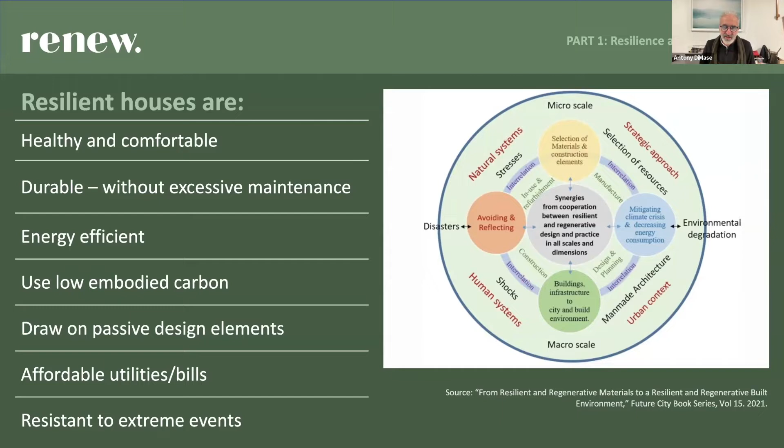Fundamentals of passive solar design.

I'm an architect who was trained in the 80s, mid to late 80s, at Melbourne University, and passive solar design is what I was taught as an architect. It emanates from the oil crisis in the 70s, when architects were looking at how the design of buildings can respond to the changing patterns of seasons, winter and summer, using cross ventilation and natural sunlight from winter, where the sun comes in at a shallower angle, while omitting the hot summer sun in the summer months. So it's very much about creating buildings that respond to the natural environment.

The term 'passive' means the design is doing all of the work, allowing the naturally occurring cycle of day and night and the changing seasonal conditions to assist in heating and cooling the house. To some extent, all buildings are passive solar designed. It's just that if you get the principles right, you spend a lot less money on heating and cooling, and you get a house that's much more comfortable to live in.

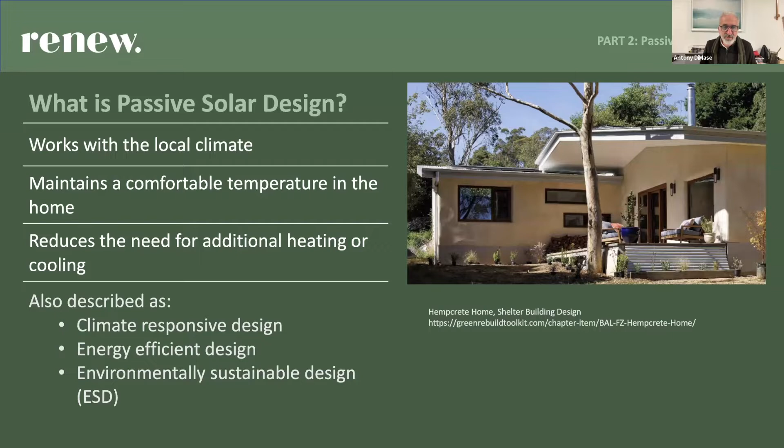The benefits, I think, are self-evident. Energy efficient houses require less energy from our gas companies, less energy from our water company, less energy from our power companies, and less water coming into the house, because we're using the resources that already naturally occur within whatever block you're in.

Health and well-being - I believe that's one of the biggest benefits of any good design, that your health and well-being is improved as a result of good design connected to the natural environment. It can be affordable. I don't think it's of itself affordable, but I think it has the hallmarks of being affordable. And of course, it's sustainable, and sustainability is such a big factor in the way we think about buildings in the 21st century.

So we want our buildings not to add to the degradation of the natural environment. By creating sustainable buildings, we're creating buildings that will last, and buildings that don't require as many resources from the natural environment for the people to be healthy and comfortable.

The main principle is that it's designed for climate, so it is very much about the local economy and the local climate. Passive heating and cooling is essentially using the sunlight in winter to help heat your homes, and excluding that sun by having shading to the north, northeast, and northwest faces of the building, so there's less opportunity for buildings to overheat.

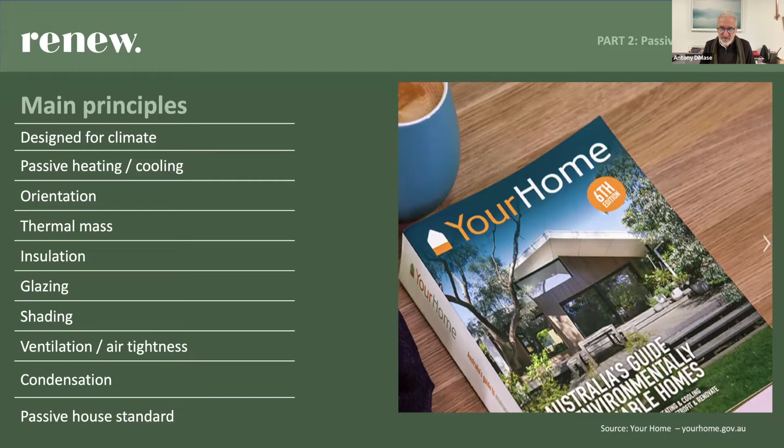Some of you may have heard of passive house. Passive house is different to passive solar design. There's lots of overlap, but they are two different standards when we're looking at the designs of dwellings in this kind of context.

We in southern Victoria are essentially in a temperate zone. We're not in an alpine zone. We're actually in a very good climate zone, because it doesn't get extremely hot nor extremely cold. Generally those shoulder months, the autumns and springs, and much of winter and summer, we actually have a very comfortable climate where the climate sort of does all the work for us.

But we do get cold and we do get hot, and we're designing buildings for those times when those things occur. You do need different passive design strategies for each of the climates, there's no question about that. So in a hot, dry climate, there's much more focus on cooling. In southern Tasmania, there's much more focus on heating the house.

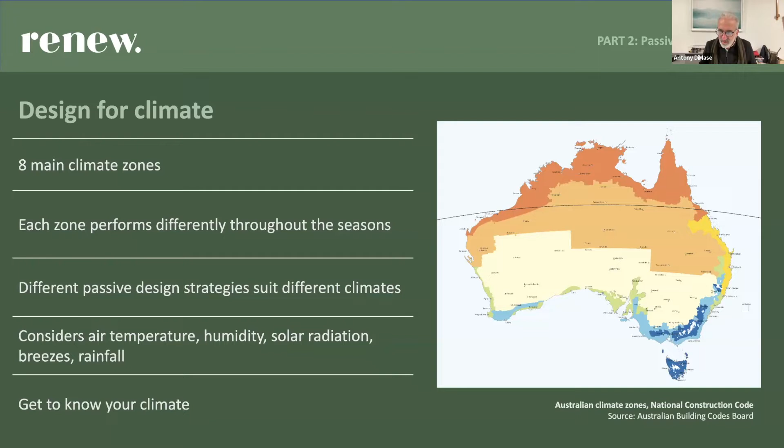Knowing your climate is key, and there are some really good architects and others who really understand the climate of their particular location. They know where the breezes come through, how the sun travels, the differences between summer and winter, and about indigenous planting, what grows and what doesn't. While we can give general principles, having that intimate knowledge of what's happening in your particular location is really, really valuable.

So the essentials, this is really the most basic things you need to know. We want to orient our buildings towards the north in terms of the main living areas, because as humans, generally speaking, we are attracted to light and sunlight. We generally feel more comfortable and more alive, naturally drawn to brighter objects, and we enjoy the heat of the sun on our shoulders.

So if we can create buildings that actually let the sunlight in, particularly in winter, that's a really good thing. In winter the sun is at a lower angle because of the way the earth is tilted, meaning it can penetrate much more deeply into our houses. This gives us the opportunity of bringing winter sunlight into our houses, creating a really nice warm effect. It can heat the slab or brickwork on the inside of our buildings, storing that energy and re-radiating it at night. That's what we're talking about when we talk about thermal mass.

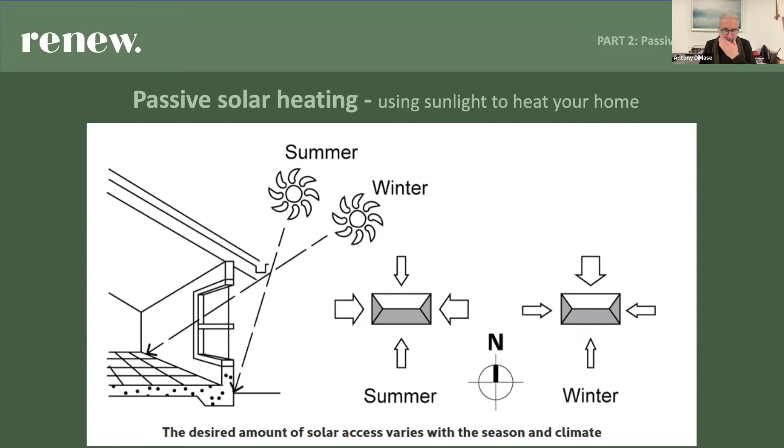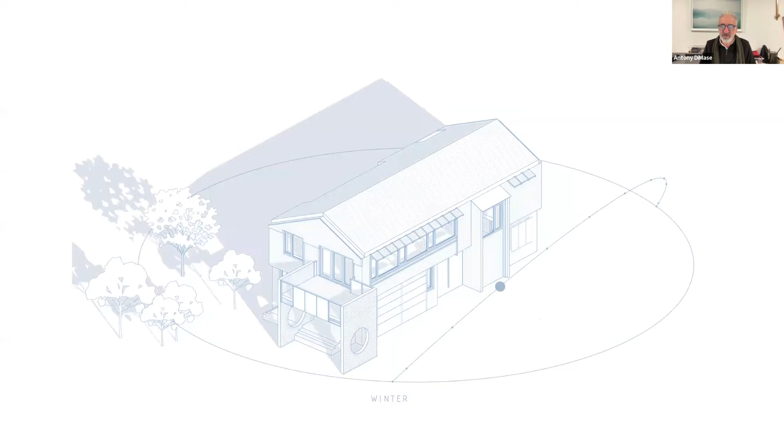You can do an awful lot of modeling. This is a project we worked on where you can actually start to look at the way the sun moves around the building and the effect it has on the interior. Just by understanding the physics and movement of the sun, there are plenty of charts and computer simulations, and architects and draftspeople in your local area will be attuned to this, but also simple observation will give you a really good understanding of the patterns in which the sun moves.

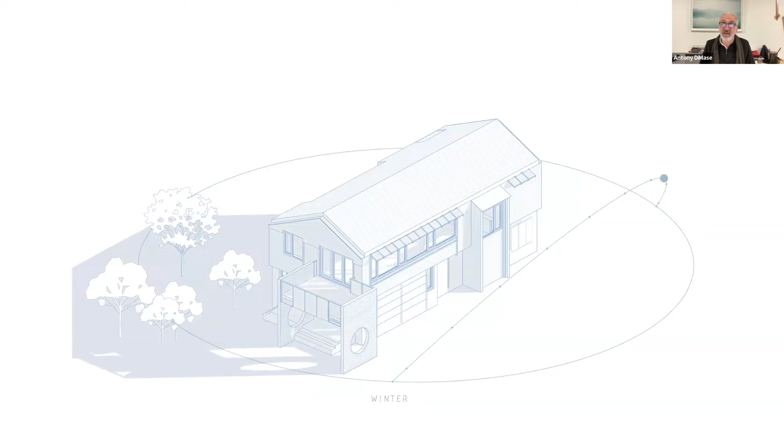I'd also say that not all houses can be oriented to the north. It depends on where you are located, and there are often constraints that don't allow you to have the perfect setup. That doesn't mean you can't apply passive solar principles to your house. Passive solar design is really understanding the physics of how the sun, wind, and rain work, and adapting your particular set of circumstances to meet those requirements.

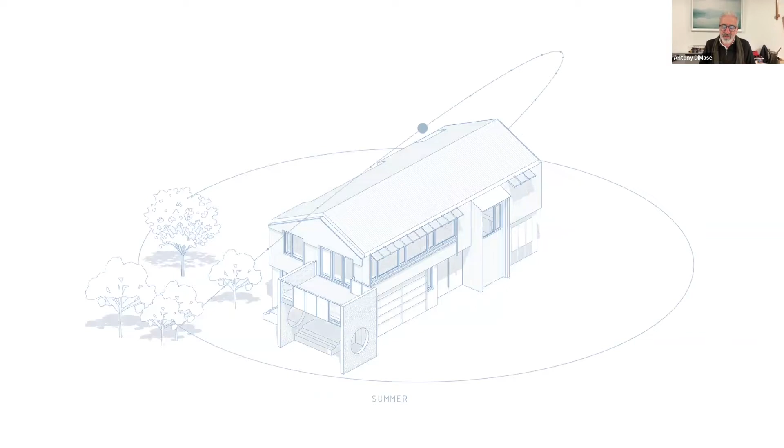So I can give you some general guidance, but the rubber will really hit the road when you're in your local area, at your particular site, really adapting the design of your building to the way those features work on your particular site.

Passive cooling, much like passive solar, is about reducing heat gain. Increasingly, even in Victoria, in my time as an architect, I think more emphasis is now being placed on the cooling of buildings. Whether that's because we're getting hotter summers or whether expectations are that we have cooler environments, I don't know. But I've observed that we're putting a lot more emphasis on cooling environments, as much as we used to consider heating.

As a rough rule of thumb, we'd say you'd put two-thirds of your energy into heating a house and about one-third into cooling. Maybe that proportion is changing, but essentially we want to exclude heat from the hot part of the day and open up the building as much as possible at night when it naturally cools down, and when there's a cool change and cool breezes. Cross ventilation by opening doors and windows on opposite sides of the building, using fans and different techniques, can really quickly cool down a house if you've got those openings working in your favor.

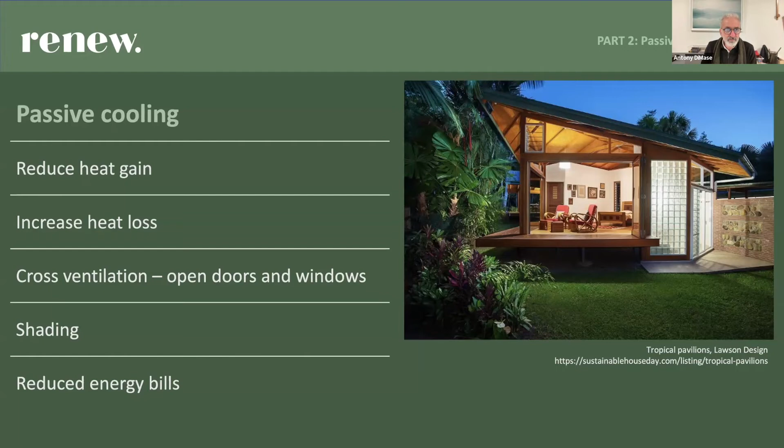So orientation, we touched on that a little before. You could consider a building as having four sides: north, east, west, and south. But more than that, it's probably got eight sides: north, northeast, east, southeast, south, and so on. Each of those orientations has a slightly different impact on the building in terms of how the sun comes in and where the breezes come from.

In really simple terms, if you can design a building that understands those orientations, you'll go a long way to creating a passive solar design building.

As I said earlier, depending on where your building is located, if you're on a suburban street and the street faces a particular direction while the backyard faces another, it may not be possible to put your living room to the north. There may be some restriction for whatever reason. That doesn't discount the importance of passive solar design—it's that you are being responsive to those conditions and adapting to suit them.

But the primary idea is that we want to orient the main living rooms to the north, particularly the northeast, because we want to get that morning light into the main living rooms. Typically we want to exclude that hot western sun, particularly in late summer when the sun is very low but very harsh, which can lead to houses being very uncomfortable. The western facade is quite hard to shade because the sun comes in at such a low angle that you can't really have an eave overhang deep enough to exclude it. So you need either a vertical screen or some form of deciduous planting to exclude that hot western sun.

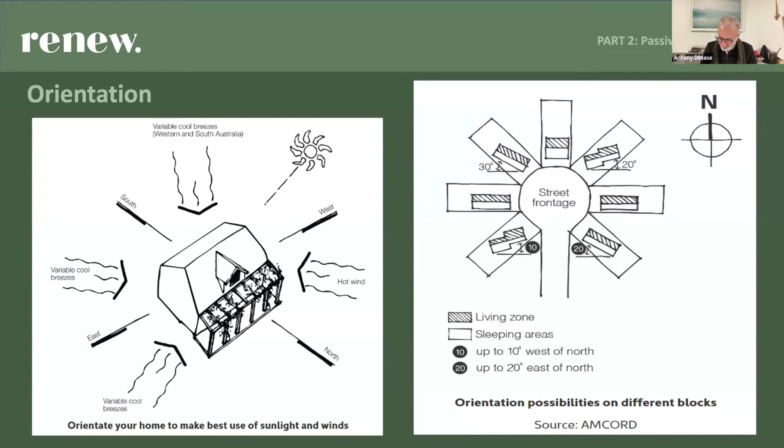Now, if you look at the suburbs of Melbourne, we're getting bigger houses and smaller allotments, which makes it harder to include naturally occurring elements like trees, vines, and plants. So I'd suggest a big part of passive solar design is actually having a smaller footprint, not a larger one, so you have the opportunity for a larger garden that can thrive around your building, creating a naturally cooler environment for the occupants. It's also a really good way to create connection between inside and outside.

So the size of the dwelling matters a lot. Here in Australia, we have amongst the biggest houses anywhere on the planet, bigger than the US per capita. The average house here is something like 250 square meters, which is quite substantial. And I've seen many houses much bigger than that.

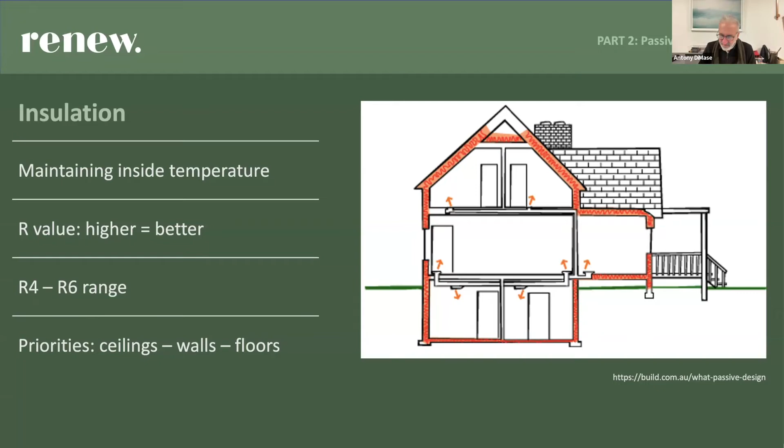Thermal mass, we talked a little bit about earlier. It's kind of hard in this context to explain, but in simple terms, if you imagine a concrete slab on the ground in full sunlight, that sunlight heats the slab over time. Effectively, that slab becomes a battery—in simple terms, it's storing energy. As the day winds down and we go into night, the energy from that slab—it doesn't have to be a slab, it can be a brick wall or another form of material that has mass to it—will re-radiate that heat into the evening.

It can work in reverse too. On a particularly hot day, if you exclude the heat from that particular material, then that material, like a concrete slab, will actually stay cool. At night, that cooling effect has a bearing on the interior temperature. So it's kind of a bit of a science, the way you use thermal mass.

I'm a bigger fan of insulation, but those who know will say thermal mass is certainly something you should consider in the design of your buildings. It's particularly suited to places like Mildura, where I'm originally from, which is a very hot, dry environment. It was a fantastic way to work in those sorts of environments because you had a big change between day and night—very, very hot days and very cool nights. So when you have that big temperature differential, thermal mass works a treat.

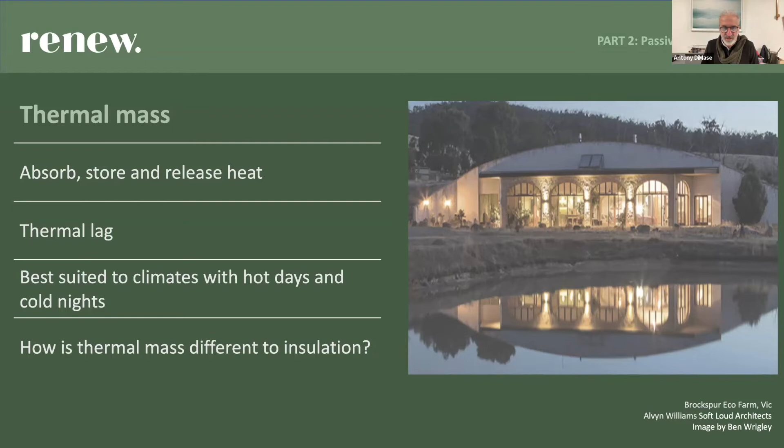Where I live, say in Thornbury in Melbourne, those temperature differentials are not as great, and I would argue it's not as effective. Those of you who are in the Shire will have your own knowledge as to whether it's effective for where you live or not—can't say hand on heart that I would know.

Glazing—I'd just really reiterate something we've seen over the last 20 or 30 years, which is the development of window design here in Australia. We've gone from cheap single-glazed windows, poorly sealed, to a really high standard of windows and glazing systems. And yes, they do cost more—I'm not going to lie—but the benefits are there for a lifetime. So getting the window design right is really critical.

Having too many windows is a big no-no. More or less in terms of the surface area of your walls, you should be looking at about 25% of the area of the walls as windows, no more than that. A lot of architects will design buildings with lots and lots of glass. I would discourage that, but equally we do want windows because we want that connection to inside and outside, and we want the ventilation. So getting the right quantity of windows is really critical when designing buildings for a resilient climate.

The advances in double and triple glazing - window performance is measured as U value. U is actually more or less the same as R, it's just the inverse of R. So generally speaking, the lower the U value, the better the window will perform.

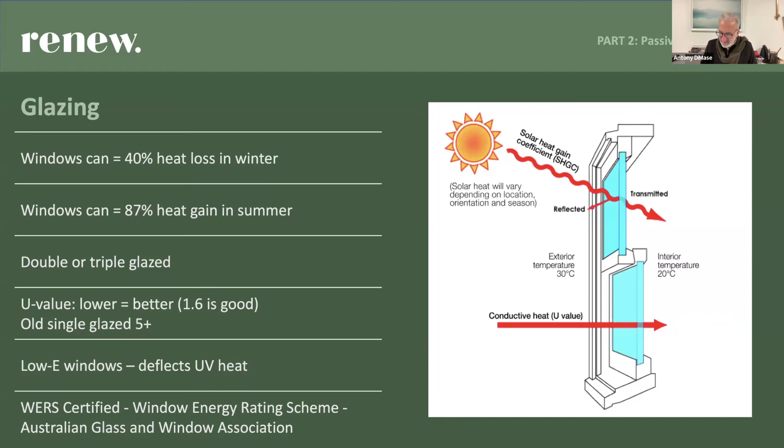Ventilation can be your friend and it can also be your enemy. If you've got a house that is poorly sealed - gaps around the door, vents, downlights in the ceilings, air conditioners with holes into the side, ventilated skylights, chimneys, poor construction with gaps in the floorboards - all of that, no matter how well your house is insulated, is going to contribute to heat loss and heat gain. So ventilation in those circumstances could be argued as a good thing because you're getting fresh air, but it's a bad thing in relation to heating and cooling. Ventilation is something you have to control when you're designing a building.

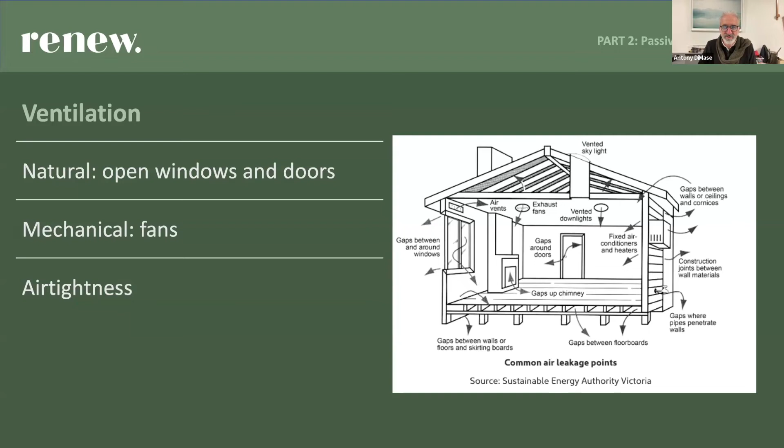You want the ability to control how much heat and cooling is coming in through your building. If you have a well-sealed building, that's what you want to get to, but you also want the ability to open up the building to let ventilation in, particularly when you want fresh air and there's a cool change after a long, hot day. So control is really critical. Most older buildings are very poorly designed from an air tightness point of view.

Condensation - if any of you have been reading The Age, there's generally a discussion going on about the fact that many apartment buildings are suffering from condensation problems, which can potentially lead to mold. This is really dangerous in a house. A house that is not naturally ventilated, where there is not good access to daylight or sunlight, a house that's small and pokey and not well connected to the natural environment, is prone to condensation, and condensation is really a precursor to humidity and potential mold. That's really the biggest problem we have in some contemporary houses, which can lead to really poor health outcomes for the occupants - asthma, respiratory problems, and poor health outcomes. So we want to avoid condensation at all costs, and create environments that are actually healthy for people to live in.

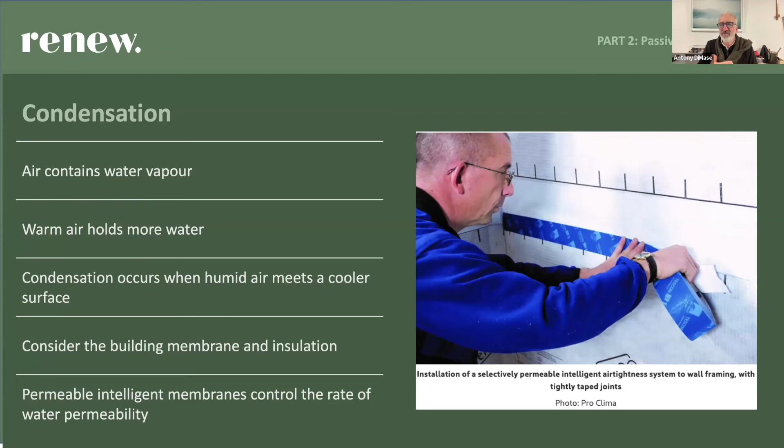Condensation, in really simple terms, is where you get hot, humid air. When the temperature of the air is relatively warm, it has the ability to carry water in it - so it has a higher dew point, it can carry more water with it. When that hot, moist air hits a cold surface, that water in the air condensates and falls onto the carpet or stays on the window or stays on the plasterboard, whatever it is. So it's essentially that differential that creates the condensation. That water is left trapped, and over time that can create huge problems for the people occupying the space.

We talked a little bit about passive house versus passive solar design. Essentially there's a lot of overlap, except that passive house is designed with a criteria in mind, and that is that there is a certain per square metre of space, a set amount of energy that can be used for that area.

It's up to the architect or passive house designer to design a house that actually meets that criteria. It sets a criteria that the designer has to meet in terms of energy use, air tightness, thermal bridging and other factors, and it's up to the architect to design to meet that. By meeting that criteria, you get a passive house standard, which generally means the energy use of that building will be far lower than other similar types of buildings.

So it's a little less vague in the way that it goes about things, and sets a criteria and a standard that has to be measured and tested once the building is built, through a whole series of calculations that occur during the design phase to ensure you are actually meeting that standard.

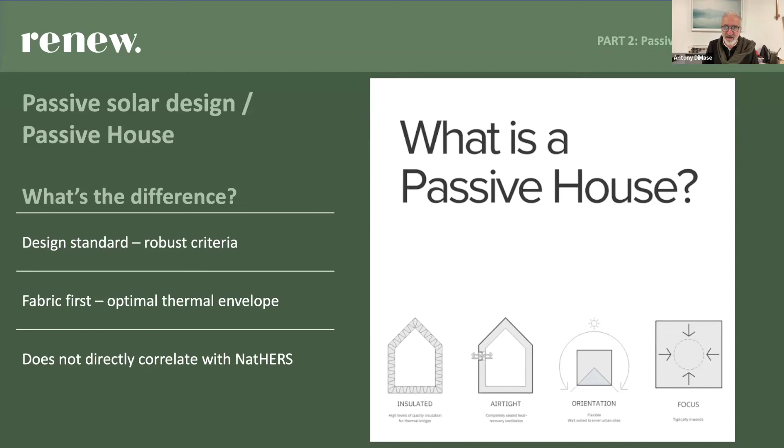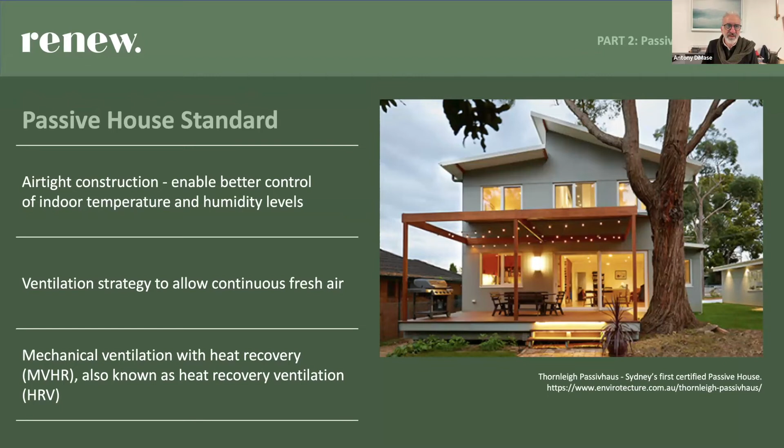Sorry, I did touch on this earlier, but it's about airtight construction - really limiting the amount of ventilation that can come in and out of your building. It usually has a heat recovery unit to compensate for that very tightly controlled ventilation system. There are other things like thermal bridging and a very high standard for insulation that is also adopted for the building.

Sorry, I'm repeating myself, but thermal bridging - I'll just explain briefly what that is. It's when you have an element that is connected between the inside and the outside, and heat can transfer from one side to the other.

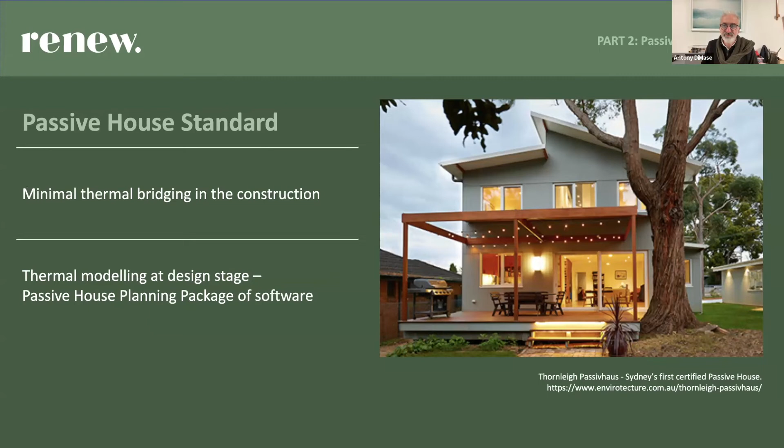Brad, did you have a question? Yeah, I do, Antony. I've been joined here by my wife, who's a carpenter, and has been enjoying the presentation. She just had a couple of questions around, I think it was, permeable intelligent membrane. Is that like a breathable wrap, effectively? Is that what that's referring to, or is it something more sophisticated?

I won't claim to be an absolute expert, but it effectively allows moisture to travel through - you see it in jackets as well - so materials can transfer moisture from one side to the other while keeping the air tightness in. Pro Clima is a company that's been doing a lot of work in this area, and the advances in that kind of technology have been really through the roof.

And just one further thing on that - does both the wrap and the cladding need to be permeable, or can you resolve that by battening out the cladding from the wall a little bit, so you've got an air gap there that the moisture can get out to?

It sort of depends on the situation. Battening is good. Generally speaking, on a typical external wall construction, you have a weather wrap which goes on the inside of the cladding, just before the cladding. You then have your bulk insulation in the studs, and ideally a continuous layer on the inside, then a permeable membrane on the inside, which can also allow for the transfer of moisture. But the outside layer, if I've understood your question correctly, is more about preventing moisture from entering the building - it's effectively the rain screen for the building. Where it sits in terms of the battening doesn't matter terribly much, but it does matter on the inside face.

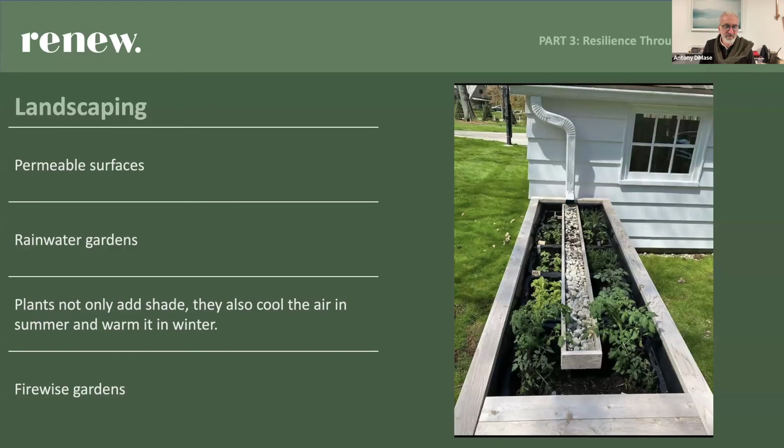Landscaping, I think goes without saying, has a really important part to play in creating a healthy, sustainable environment. Permeable surfaces so that water is actually absorbed into the ground, rainwater gardens, plants that add shade and cooling, indigenous planting that encourages local wildlife or local flora and fauna to thrive around your building - I think that makes really good sense, and buildings that are sensible in fire-related areas.

This is where it gets a little bit scary, because when we hit summer we see bushfires, we see flooding, we see a whole range of things—it's kind of scary. And I'm no different to anyone watching this webinar. Making buildings climate and disaster resilient is really critical, and we all have to play our own individual role to protect our own asset, but we also play a role in the broader community.

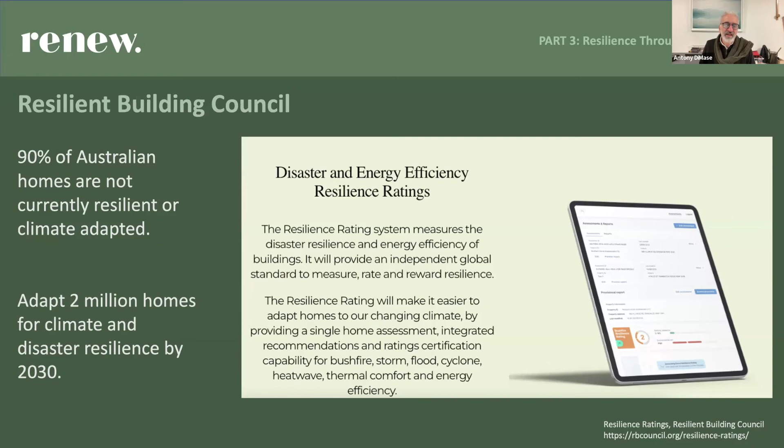We don't typically design buildings for resilience to climate impact, and it's sad that we have to do that. We generally design our buildings because we want family homes, places where we can live and thrive. But increasingly, we're thinking about what happens when there's a particularly hot summer, a particularly cold winter, or heavy rainfall. We're in winter or spring now, and we can't remember what it's like when it's hot and there are bushfires, but they happen—smoke and extreme events are just around the corner.

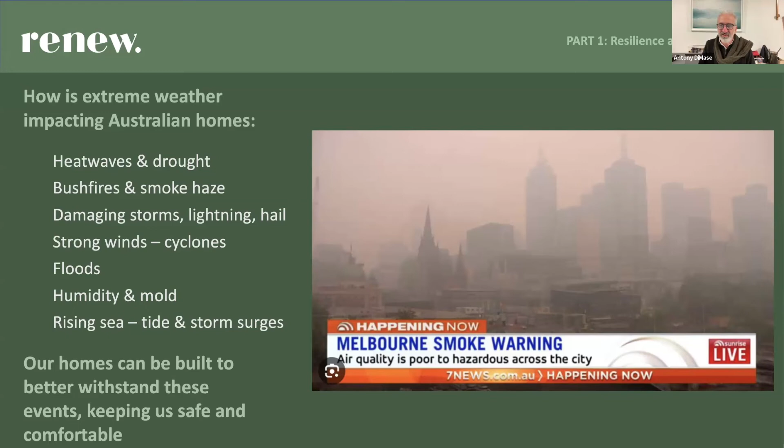It's particularly sad that we're confronting this. Bushfires have always been a feature of our landscape, but it's the frequency with which these things are happening. So creating buildings that enable people to live in those spaces and prevent fire from taking hold is something we really need to think about.

Preventing ember attack—my understanding of this area of expertise is that simple decisions can make a big difference. I also know how quickly fires can ravage a house and a community. Those critical moments when a fire is upon you are really important. Human life is much more important than our building assets, so I'd encourage anyone listening to prioritise their own health and safety in these extreme events.

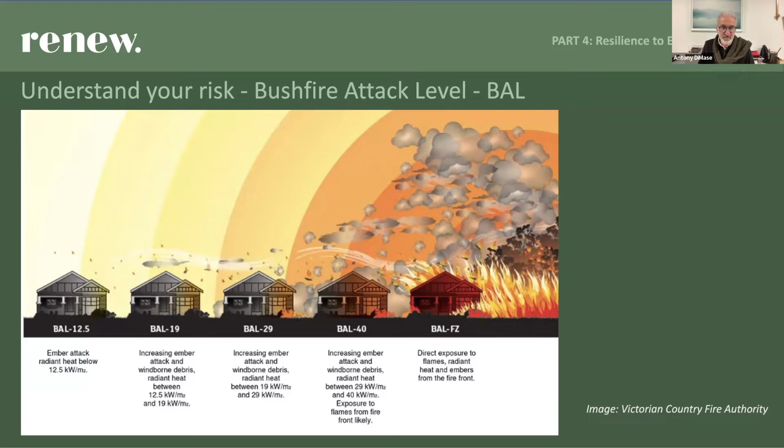We are seeing more floods in where I live, in Thornbury, inner city Melbourne. There's a lot more focus now on floods, and just being aware of that is really critical to what you're going to do. Floods might seem like they're not that invasive, but having seen what floods can do to a house is quite dramatic, because it comes in at that low level.

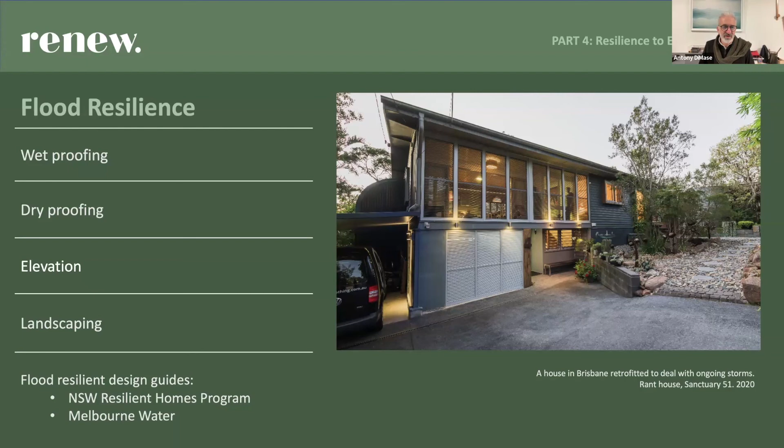It virtually impacts everything that you own and value—it comes in at the furniture level. It can erode and destroy carpets and doors. So how we design buildings to be flood resistant is really critical.

Look, I feel like I've gone on a bit, but these are some of the buildings that we've designed, which I would argue are climate resilient and connected to the natural environment. I'd really encourage people listening to this webinar to know...

...that there are lots of times in the year where it's actually really good weather, and where we can create connection between inside and outside—spring, autumn, even large parts of summer and winter. We're really blessed to have a beautiful environment here in Victoria, and creating buildings that are responsive to that environment means you're going to create a kind of house that's connected to nature.

While we're talking about some of these more extreme events, it's also important to recognise that the majority of the time we actually have really good weather, and creating buildings that are connected to the environment is a healthy and positive thing to do. We just need to be mindful of those extremes and create buildings that help us adapt to those extreme events.